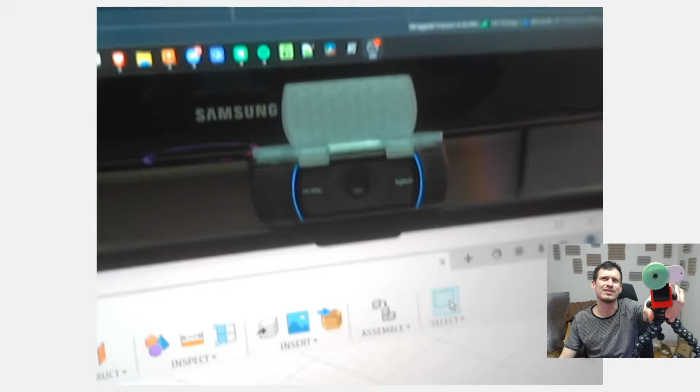What webcam is this? I don't know if you're referring to the webcam I'm holding, or the other one - there's 2 webcams. This one has a privacy shield that I printed, which was someone else's design, printed very long ago so I can't say more. The one I'm holding is an even older Logitech that I customized - I forget if it was broken or didn't have manual focus before. I think it might have been a fixed focus webcam, so I took it apart to add manual focus by unscrewing the lens. That works pretty well, so now I can do cool macro shots - not the highest quality webcam, but I can get close-ups of my sketchbook. For now I'm just using it to point around the room and show you guys things, since that's my setup right now with these 2 webcams.

Of course, I have my very nice camera that I use to film my videos. It's a GH6 that I'm up to now. I had the 5 for a while. I had the 4 for like a week before I found someone selling the 5 for the same price. So I traded those out.

That one, it's a bit of a process to stream using it because I'm using the USB-C storage. Oh, I can't be bothered to explain. I'm gonna eat another pastry. Then we're going to talk about last week's project, then we're going to start this project.

Nina, you haven't missed too much. You've missed the common ramblings of Devin. I mean, you missed me enjoying my first biscuit pastry, but I'll probably be enjoying my second nearly just as much. Although that one was pear flavored, which is extra novel to me.

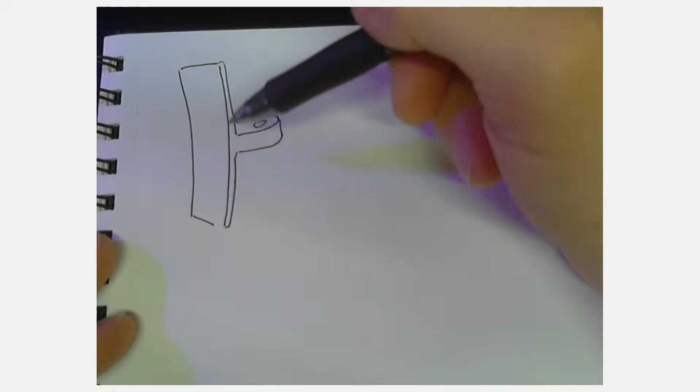Here's my idea. We got the curved monitor, funky curved monitor. So I'm going to make a hinge between the two because I do want to be able to adjust the position of the speakers slightly, but I'm thinking something like this. So this all being TPU, this here it's curved, but really it would be printed flat on the bed. Put some high bond double stick tape here. That can flex to conform to all sorts of different surfaces.

So not only will it be easier to design, but it'll also be more versatile so other people can use it, because I'm sure it's a very small margin of people who have the same two things they're trying to stick together as I do, these specific Creative speakers and this monitor mount. The speakers are not too heavy. I'm confident that weight won't be too much of an issue. There could be a little bit of sag, but I think I'll be able to compensate for it.

And also, the awesome thing about something like a Shore 90A TPU is you can really affect the flexibility based on how thick you print the parts. So you can even have different thicknesses within the same part and have some parts flex while other parts are nearly as stiff as PLA or any other print.

I'm also using this VHB tape for most of my projects where I'm trying to tape things like these hooks that I've been using. I have screw mounts, of course, but a lot of them I've also just been using acrylic double stick tape to stick it on my kitchen tiles and things like that. But that stuff works for most cases. In this case, I'm going to use some VHB tape, which is a little more permanent.

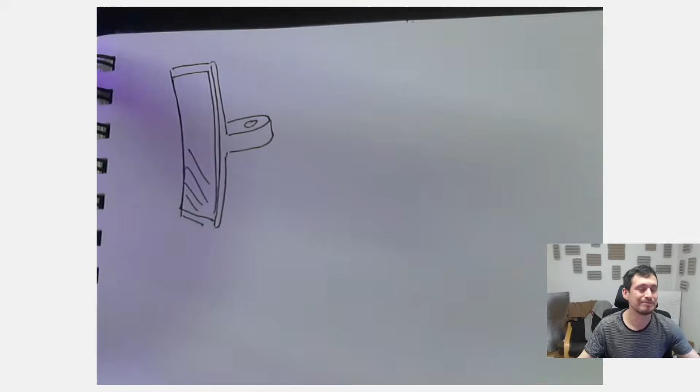This is a knockoff tape. These Chinese pirates have been very clever. It's not 3M, but it's 3M. I think that's so funny. Yeah. MMM. I think it was advertised as 3M VHB tape, but no, it's just 3Ms. Pretty funny. I'll give them that. And there were reviews. It has good reviews. I'm in Sweden now, so I'm closer to China, so it's less of, I don't know. It's probably still controversial, maybe. All right.

Evia, thank you. Thank you for the compliments. I'm loving it in Sweden. I'm so happy with my decision to relocate, and specifically very happy that I ended up where I am. I'm sure I'd have a crazy adventure moving anywhere across the world, because it's just such a game changer to switch things up like that. I lived in California forever, so to move to a totally different country, so cool.

If you can do it, and if you're confident enough to do it, I highly recommend it. To be honest, I probably wouldn't have done it without my sister already living here and being fully settled to help me out a ton. But it still was a bit of a gamble. It definitely was a risk, and it's paid off so well.

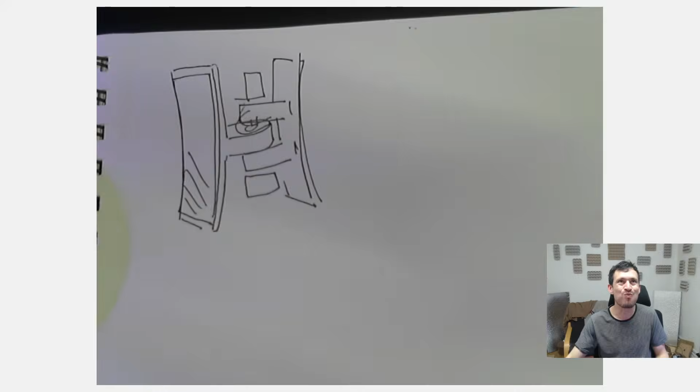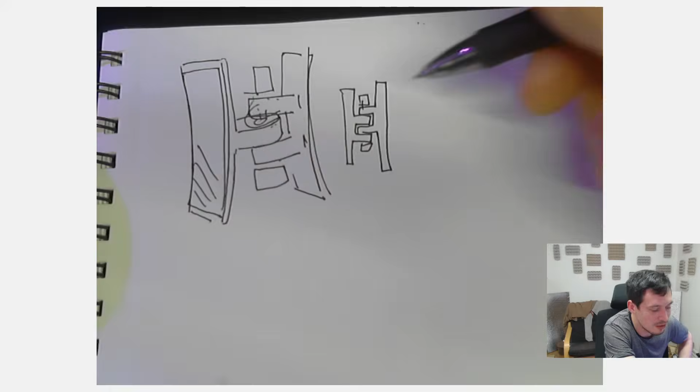I think that sketch, again, is pretty much all I'm going to do before I take it into Fusion. I think I have a pretty good idea of what I want to do. Although if any of you have some insight, obviously the more levels of hinges connecting, the more stable it will be. Like if I had 2 and 2 like that with a screw running through the center, that would be really strong. But I'm also considering just doing 1 and 1, making them thicker, and it'll be screwed together. I feel like that'll be enough, and that'll affect the flexibility a little less.

Maybe I'll go with my initial gut here, have a 2 and a 1, just so that there's some sandwich action going on. I don't really want to make it so that I have to adjust the screw to swivel these two parts. I want the TPU to act as a bit of a friction fit, if that makes sense.

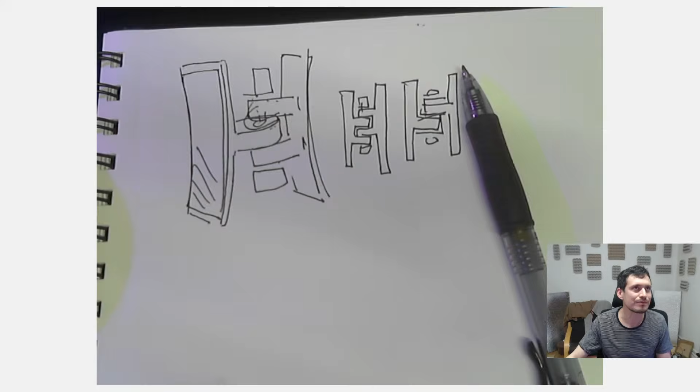Yeah, GoPro, make it like a GoPro mount. I think those are like 3 and 2, right? But see, those are being used for people who are jumping out of planes and stuff like this. This is a rather lightweight speaker just sitting on my monitors. I feel like that might be overkill, and I might just be able to get away with a simpler design. And maybe it'll even work better in some ways. To be honest, I'm not entirely sure what the best route is to go here. But I also don't think it matters too much. It's not going to be a super consequential decision here.

For the most part, the speakers are going to stay where they are, but I want them to swivel. Specifically, I want to be able to turn this one, which will be facing like this, this way so that I can point outside of my office door, and that's where my kitchen stands, because sometimes I like to play music into my kitchen. And these, I think they're tweeters. Are they tweeters or just the stereo speakers? They're very directional. So I do want them pretty much pointed right at my ears.

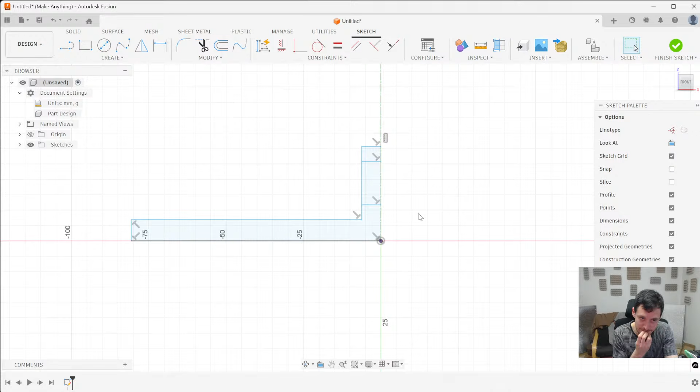We'll draw a line on the bottom. We're going to give it some thickness. And here's going to be the hinge. The hinge will also have a hole running through it because we're going to have a screw running through that hinge. Let's see. The thickness. This is where experience comes into play. I've worked with a lot of TPU, so I can imagine how thick I need this strip to be. I want it to be fairly sturdy. Like I said, there might be some drooping if I make it all too light. And I know this TPU will be flexible enough up to 3 millimeters. I'm gonna go with a 2 millimeter thickness.

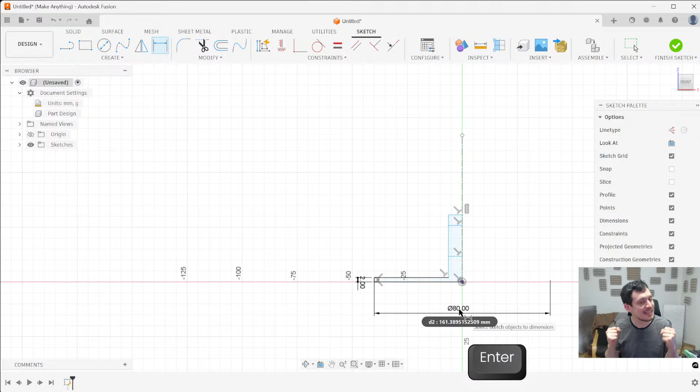We're gonna extrude all of this after the fact, so I will extrude it to match the width of the VHB tape here, maybe a little bit wider, but that's not a concern yet. We can think about basically the width of this strip, which will equate to the amount of tape we use. This tape is quite strong. I think we can get away with 80 millimeters. 80 millimeters of VHB tape on the monitor, 80 millimeters on the speaker should be plenty to keep everything stuck right where I want it to be. It's also a good length. As always, I suggest using calipers to visualize the ideas, so maybe I will want to go with less after visualizing this. There, 80 millimeters on the side of the speaker. I mean, seems pretty perfect to me.

Oh, by the way, from this view, you can see these PlayStation controllers, and these are actually mounted using the same technique as the hooks I designed. I used the exact same snapping dovetail design that I used for those hooks from last week's live stream. Made some mounts for my PlayStation controllers as well. I forgot to share that earlier. I kind of got carried away with these hooks since last week, and I've been doing nothing else besides making more and more hooks. That's very typical of me.

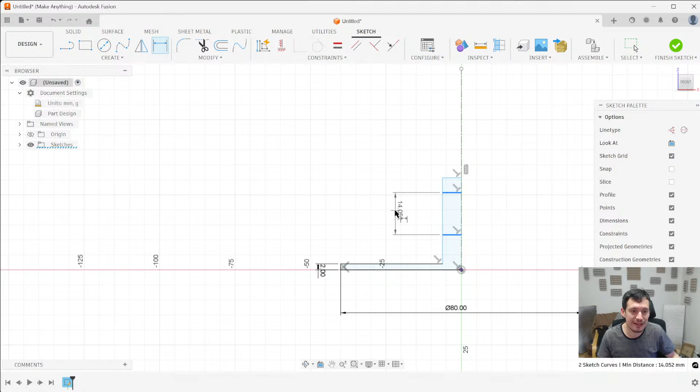Anyways, yeah, that visualization, I'm happy with that, and I think it'll work well. Next up, we've got this distance. This is going to be the hole that we have a screw running through. The screw, while it could be printed laying flat, I think I'm actually just going to print this vertically, which is not the best for strength when it comes to layer adhesion. But if I print it with enough shells, and if the diameter is large enough, it's still not a problem. So I'm just going to make a really nice chunky screw. It's going to be, let's say, 14 millimeters in diameter. And so this can be 15. We don't need to make the clearances super tight.

And you know what? I'm actually going to start designing, I think, all the parts within this sketch. And I am going to do the sandwich design I mentioned, so it's nice and easy and symmetrical. Now we're only designing half here. Just realize that we're going to mirror everything across this center line.

Oh my gosh. This is embarrassing, but I just learned this trick today on the Fusion subreddit, and I think someone was telling me to do this during last live stream. If I have this dimension, I can just click. Oh, is that not true? Someone mentioned that you can click on another dimension. No, because that's just going to tie the two. There's some way to, like, tie them together more easily.

Darn. What is it? Do I click on the dimension and then click here? There's some way to automatically connect those dimensions. If anyone knows in the chat, just let me know, because I heard it today and I was like, wow, if that's true, I've been doing things more difficult for a long time.

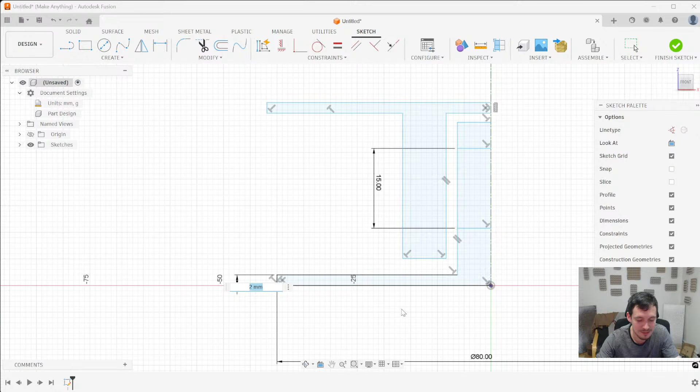Yeah, so I know you can reference, for example, here's how I would have done it before. I would have said strip equals 2 millimeters. And then I can go to this one and just make this one called strip. And then they're referenced to each other. Whoops. But is there an easier way of doing that? Whoops, I undid too many times. Strip.

So this is useful if you are using dimensions that will be tied together throughout your entire project. Now, if I print this and it doesn't work, I can make this 4 millimeters, and this one also becomes 4 millimeters. Obviously, in this case, it's just 2 dimensions, so they don't need to be tied together, but, yeah, I suppose you can also look into here. There's a parameters menu, and you can find it here, and it'll have a default name. I don't know. That's too complicated for me in most cases.

Also, very often you can just reference things or make things equal with constraints. For example, these 2 lines, I could do a collinear constraint, and then if I change this, the other one will stay collinear. That's one way to tie them together. But actually, lately I've been trying to avoid having these constraints too much because they actually can break sometimes and it gets very cluttered when you have too many.

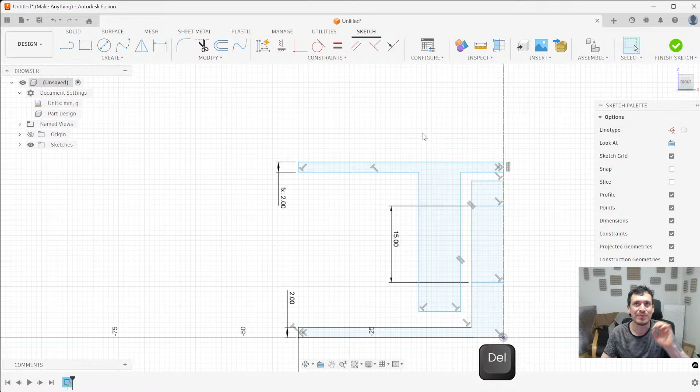I really think Fusion can improve the way that you can sort through constraints. For example, when you have one point with like 5 different coincident constraints, it can be very hard to select the one you want. So in this case, instead of just doing that collinear constraint, I might actually draw a physical construction line here, constrain that as vertical, and then it basically has the same effect, but you have more of a visual reference of the constraint there. And it's easier to delete it by just deleting that construction line down the line.

Anyways, here we have this piece here. Now, this is being printed in TPU, so we want this to be a little thicker. We want it to be rather chunky. I'm going to go with 14 as well. Could be 15. Sure, let's do 15 here. And because this is a center line, as you can see, this dimension is going all the way to the imaginary other side of this design. I will mirror all of this. Oh, maybe I'll mirror it actually once it's a physical thing.

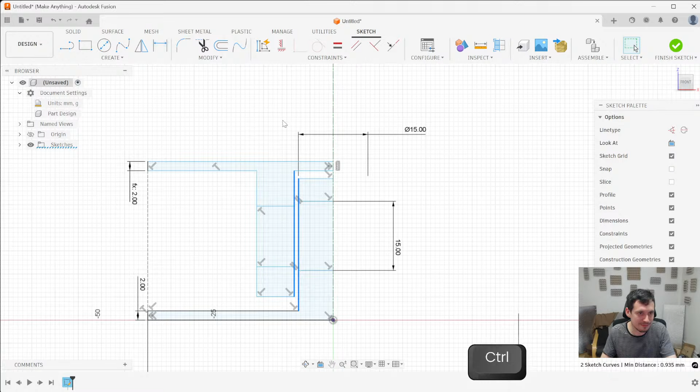So we're gonna have the same thing here. Actually, when you have a bolt running through a hinge like this, you often want the sandwiching hinge to be slightly smaller. That way this inner one stays loose. The friction is going to be between these two parts. This is going to have a very small gap. I'm going to make it 0.2, but we're going to tighten bolts so that it can be as tight as we need it to be. So this I'm just going to make 14 point... Well, let's make this one 15 and this one 15.6.

And then we can do more construction lines between these midpoints and between these midpoints, and then between those midpoints, all of these, just so that these stay centered with each other. If I constrain these to all be horizontal and vertical, now they move together, even though they're not collinear. There's many ways to do that. We could have had this line run all the way through and then offset a line just for this hinge. But anyways, this is working.

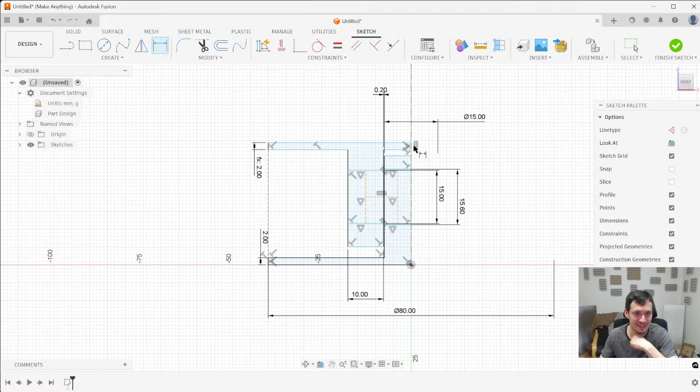This will also be 15. It's going to be a really chunky part, but actually too chunky. I'm taking it back. This can be thinner since we're having two, and we want to retain the flexibility of this back piece. So if this got too thick, this section of the strip will be less flexible than this section and this section. So we want to keep it small enough so that it doesn't matter, basically. Okay, let's see. Next up, these can be collinear.

Between the hinges here, we don't need too much space. We can make it 2 millimeters. We are going to round the ends here so that they can hinge quite freely. Now let's see, what is still lacking constraint? These could be longer or shorter. Did I not? Oh, yes.

How much space is going to be around the holes? That doesn't need to be too much. I'm going to go with 6 millimeters. And 6 millimeters here as well. Now, with all our constraints here, you can see all the lines have turned black. That means we can't click and drag anything anymore. Everything is fully constrained. All of these measurements tell Fusion exactly how these parts should look.

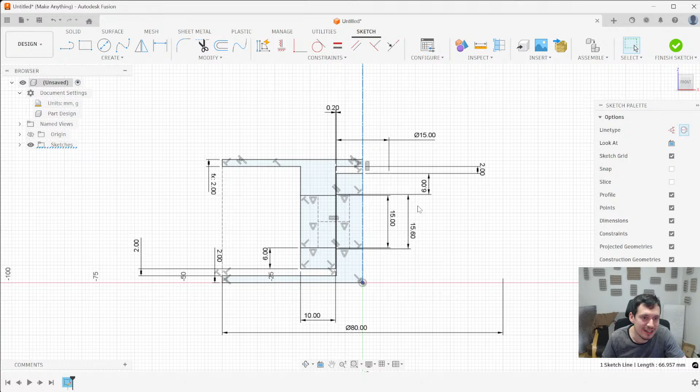Now this center line, it's more often used for rotations. I believe if I try to extrude now, oh, I can't extrude everything. Okay, so let's just do it this way then. We'll extrude. We're gonna do a symmetric extrude. I like to always use whole length just because it's more intuitive. The VHB tape, I think it's 20 millimeters. I'll measure, double check with my calipers. Yeah, just under 20. So we can make this strip 22, just give it a little bit of extra edge.

Oh, whoops. Oh, haha. Yeah, I'm going to select all of those for now. I'm going to have to cut the holes out of here as a separate process, but let's do this. Let's do a mirror command and mirror both of these bodies across the right plane. We can just use the join operation since these profiles aren't touching. It'll keep it as 2 separate bodies.

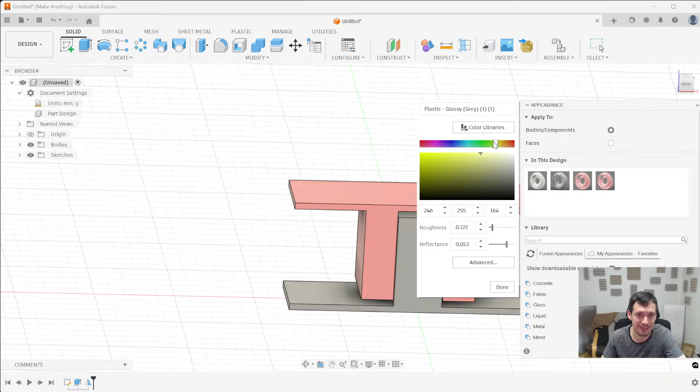I can open the appearance panel and give them 2 different colors so that we make sure that we don't accidentally merge them together and not realize it for a long time. Speaking of not realizing things, I'm going to go ahead and save my project now.

So, meanwhile, I will try my final biscuit, the strawberry one. I guess it has a white chocolate coating instead. Not a big fan of white chocolate, but maybe it's strawberry cream. Let's see. Very good. But I think the pear was actually my favorite, so I'm officially a fan of pear flavor. Bring it to California. The US needs to know pear flavor.

Okay, let me save this really quickly. Monitor to speaker mount. Easy.

Okay, so yeah, I didn't consider that these holes actually want to be a revolve. So we can use this line here. Whoops. There we go. We can also make that a center line. There can be multiple center lines within one sketch. Now I can go into this feature tree, turn that sketch back on to use it for a second operation. And now if I just click here, it's gonna by default try to select this face, but I want to select the sketch within, so I can click and hold.

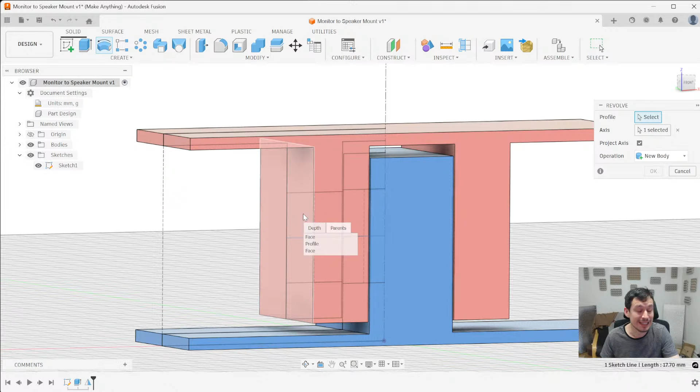Oh, sorry. I have to first go to profile. That's the other thing. When you have a center line and you click something like revolve, it'll automatically select the center line as the axis, which is nice, but in this case I just forgot. So now I go and click profile, click and hold here, and then I can select that profile. If I hold control, I can select this one as well. Oh, but now it's only half. Okay, that's okay. Let's hit okay, and then we'll actually drag this.

Another fun thing with Fusion being parametric is we can go down here. There's a timeline of all the processes, and we can drag this hole we just cut to the front of the mirror. And now that hole will be mirrored as well. Next up, these rounds should be matching. What was the thickness here? 15 divided by 2? No. 22, right? So let's make that 11. And 11. So that it's a perfect round.

Although, yeah. I'm going to have to make some changes. Because these circles, there's not a consistent width around here. I got a little sloppy with my sketch.

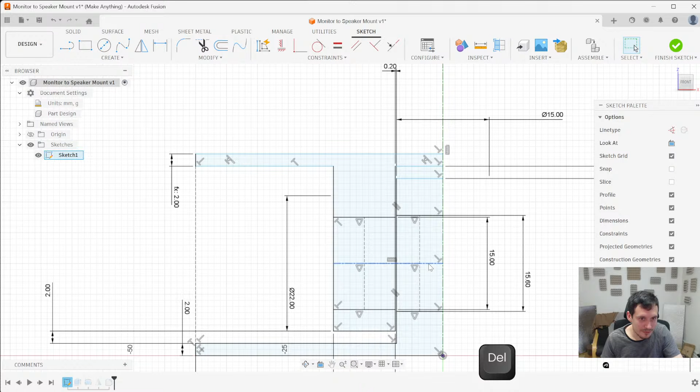So rather than making this 6, I'm going to dimension between here and the center line. Or I guess, yeah. And make that 22. Whoops. Let's constrain this. 22. Now I believe, yes. Now we have a nice consistent thickness all the way around this, and the thickness of this 3.5 millimeters. It's a bit small, but you know, compact design is nice as long as we're able to tighten the little screw that's going to be in here.

Will I be able to fit my thumb between these parts? So silly as it is, I can actually just use the calipers and measure the thickness of my thumb with a little bit of space. Let's say I want it roughly 27, 28 millimeters. Now I can select these two surfaces and see that here the minimum distance is 26 millimeters. So pretty good. Pretty good. I think I can accept that. That'll work.

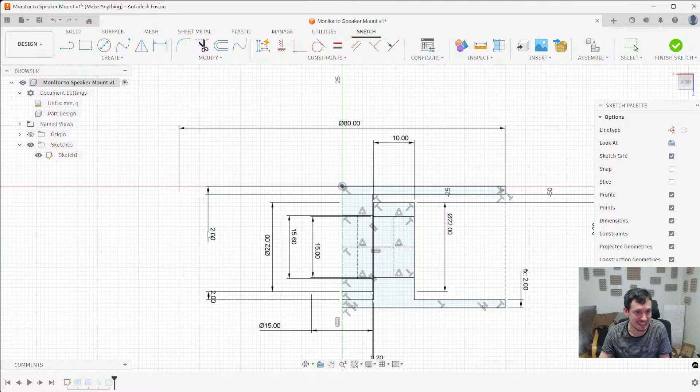Okay, I'm not going to accept that. I'm going to make it a little bigger, make it comfy for myself. So to do that, I'm going to increase this gap, the space between these. I'll make it 5 - let's be generous.

So now if you check here, it's 29 millimeters between them. And did I do something to make this thicker? Why did those become 5? Are these dimensions tied together somehow? What have I done?

Oh, I clicked the wrong one there. 5. This should remain as 2. There we go, got it.

This is nice, parametric design - so fun. You can be really quick and sloppy because you can always go back and fix it. So I'll make a lot of little mistakes like that, but it's not a big deal. In something like Blender, where your decisions are more baked in, it might be more annoying. Doesn't work for me personally.

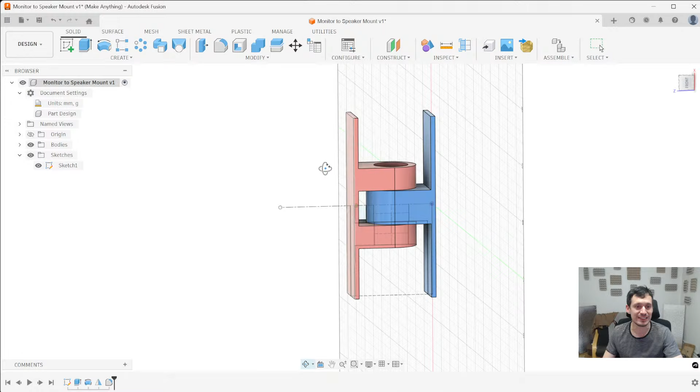Anyways, now we've got a very simple hinge with these thin surfaces that will remain flexible. As I mentioned, these areas here will be less flexible - they won't really curve, but they're such small lines that with the allowance of the VHB tape, which also has some thickness, I think it'll conform very well to the surfaces of my monitor and my speakers. So I'm happy with that.

Next thing we're going to do is design a screw, a nut and a bolt to hold these two parts together. I'm not going to do anything too crazy - I'm not going to capture the nut inside of the design. We're doing it quick today because this design is just for me, since no one else has this combination of speakers and monitors, but I am designing this in a way that it's a little more versatile, so I should spend the time.

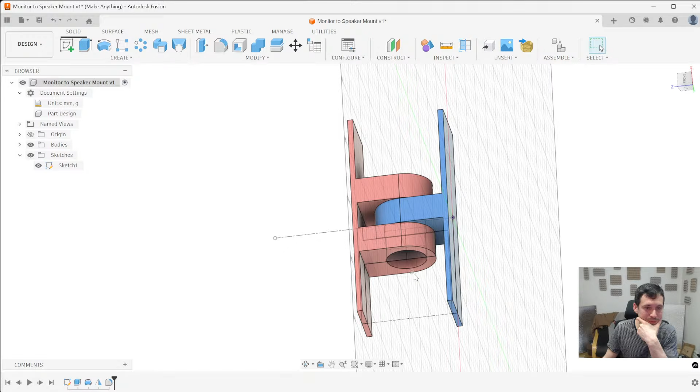I'm going to make this thinner - it doesn't need to be that beefy. I want a little bit less space there. And what else do I want? Will I capture the nut? I think I will. We'll get there.

For now, I'm going to do - oh no, Fusion just had some big update. Apparently they've added an AI assistant, but luckily Fusion Clippy hasn't popped up for me yet.

But I did notice this display component colors has come up on my menu - can I get rid of it? Oops. I honestly never need to work with components. My projects are simple enough that I just deal with multiple bodies within a single part. So right now I can click on these 3 dots and unselect pin to toolbar because I'm never going to use that. I can even go to change keyboard shortcut and delete that because I don't want to accidentally press Shift N. So if you find yourself being sloppy like I do and suddenly all your parts change color, then maybe it was that, and maybe you want to get rid of that shortcut.

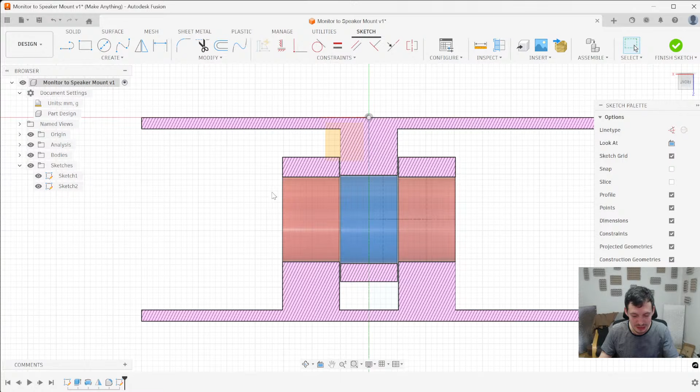Anyways, one thing that I did add to my toolbar here is this section analysis - I use that very often. And we're going to do that now. Section analysis right through the center so we can see it like so. I can turn on the origin, select that front plane, create a sketch, and we're going to draw our bolt.

So we're going to start with another center line - this is going to be a pretty simple shape. I can hit P to project and select one of these holes so we can reference that. If I draw a diagonal line between the two, and then use the point tool, I can drop a point in the center of that - that'll give us the exact center. I can select this and use midpoint, and now this is locked in the same axis as these holes.

Very good, now we can simply draw our screw. Let's go like this - it's gonna be a bolt, it's gonna have a little head on the top that we're gonna use. Oops, I forgot we only need to draw half of it. I'm gonna give it a nice tall knob for controlling - and actually, the knob, no, this is fine, it just needs to be a little bit bigger. I want it to be a rather thin, tall thing so it's very easy to twist - we'll give it some good grip as well.

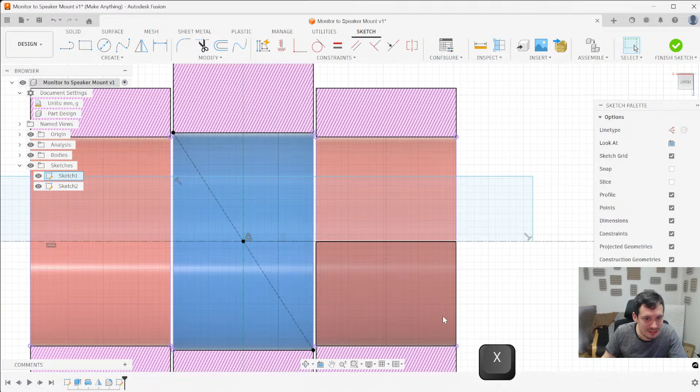I'm also going to project these two surfaces because we're probably going to need the start and end. We could click on those projections - am I selecting the... here, select these lines. Normally X will turn them into construction lines - it worked there, it's not working here. Not exactly sure why.

Anyways, it's nice to turn a lot of projections into construction lines if you're just using them for dimensions, so you don't have to select as many profiles later that get in the way.

Just very little tolerance here, 0.1. How far do we want this to extend? Quite a bit, so that we can have a nice, good bolt on there with plenty of threads. Although, like I said, we're going to capture the nut, so the nut is actually going to be overlapping with the bottom here a bit. I'll probably adjust this. Let's make it 10 for now.

Thickness of the nut at the bottom, just gonna use my calipers. Let's go with 14. This can be pretty wide. Oh well, yeah, I forgot it's also large. Maybe 25.

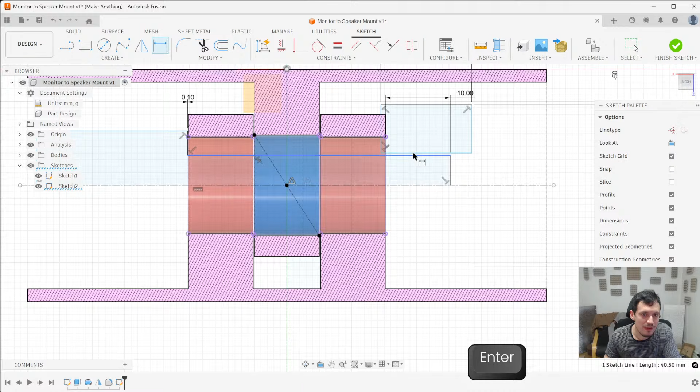This doesn't matter because we're gonna add threads there, so the inner dimension, those dimensions will change. This head, let's see what it's at. 16. Let's make it 18. Just going by vibes right now. Making this 20, nice and tall, like I said.

Might still be annoying because I forgot I need 2 fingers to reach in between there, unless I use an Allen key. I really kind of want a lot of space between these parts to be able to adjust them with my fingers. Like 45 - either I make it 45 or I rethink how I'm connecting these. Right now it's at 32. I mean, the thickness doesn't really matter, it's going to be hidden.

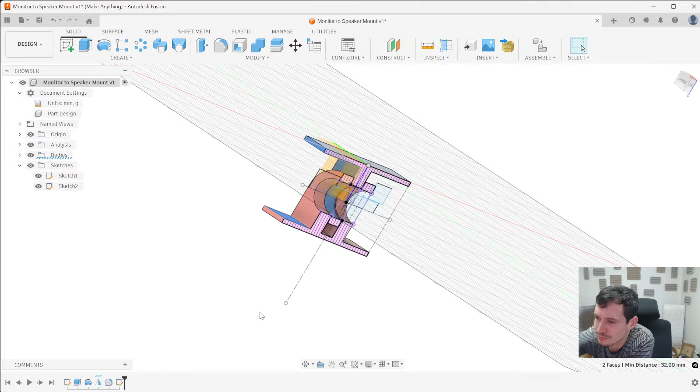I just had a realization - this design isn't exactly going to work the way it is right now. I need 2 hinges if I want the speakers to be able to wrap around enough to face me, because these two will just not work. Let's see if I can illustrate this. If one of these is connected on this flat face and the other one is connected to the back of the monitor, it'll only be able to fold so far, and I need it to fold all the way around like this. So I'm going to need 2 hinges, I think.

Which isn't going to be such a huge change, but it is a change to the design. Again, parametric design to the rescue. I'm going to go back to my original sketch. So this is how it's going to go down. I'm going to delete some things, but I'm also going to stick with a lot of things. I'm going to delete that dimension that I had there.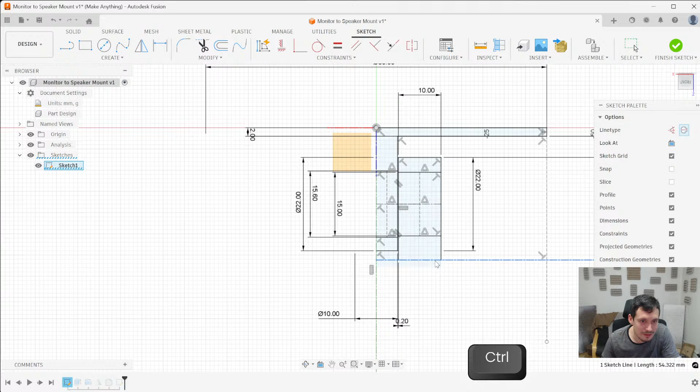So I'm just going to mirror everything here, and I'm just going to add another mirror line. Check this out - it's a quick fix. It was a silly mistake, but it's a quick fix. We'll make it a center line. Now I can select - well, we can also do this later. Let's see.

But yeah, we still want the distance here to be something. Now it's 58 with the double hinges, and I'm even going to make it 60. It's all going to be going backwards behind the monitor, so it won't really be visible. Oh yeah, now I'm breaking a few things, but I can just go back here, do that. That's okay, this is okay.

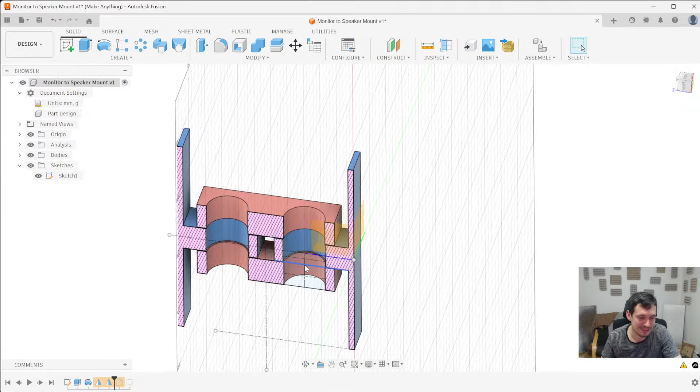This mirror made it a little unhappy for some reason, but now I'm just gonna mirror again, but along this axis. And boom, now we've got 2 hinges. It wasn't a big loss. Let's see, what are these warnings? Compute failed, could not join, multiple bodies created. Okay, I mean, I didn't want it to join everything, so that's actually an error, but exactly what I intended. So I can ignore those, basically.

Here, yeah, these edges change. I'm gonna select these, turn off analysis here. Make these 11. Make these 11.

I built it different. What is my favorite brand for TPU? I've been trying a lot of different TPUs. Certainly the really cheap ones can be a little stringier or need to be printed a bit slower, but I, for one, usually will accept that for the cost savings because I'm printing a ton. It's nice to save money. But that said, after using a lot of these cheap ones and noticing a little more stringing and messiness, I've come to appreciate Bambu's TPU, because my Bambu 90A, 95A HF, I think - I don't know what the HF stands for. High fidelity? I don't know.

Anyways, Bambu TPU works really well. It gives me some of the cleanest prints.

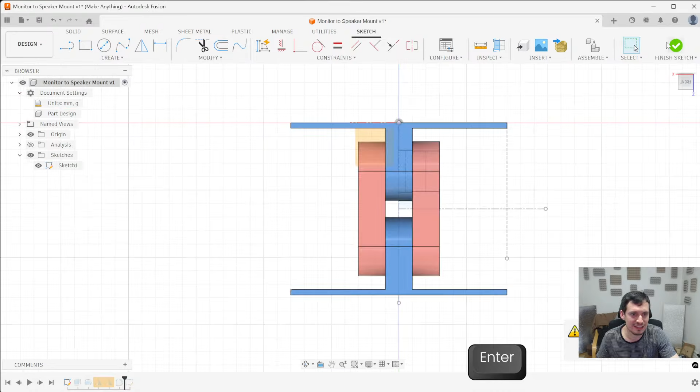There we go, I think that fixed my design error. You know, I blamed these live streams for potentially me making silly mistakes. But now that I think about it, I spend so much time here just rambling and dilly-dallying with the design that I am noticing some things that maybe I wouldn't have noticed before printing a prototype earlier.

Anyways, let's get back to this sketch. Now we're just going to have 2 screws, but we'll have more space for them. Ooh, but there will still be not as much space between the - oh sorry, wrong camera. There won't be as much space between the screw and this wall, which is essentially the monitor and the speaker. That spacing is more important. Oh no, we'll be able to grab it from the side. Never mind, everything's good, it's all good.

I mean, I feel like the gap here is unnecessary, but I don't think it's hurting the design either. I think we're okay. Let's edit this sketch.

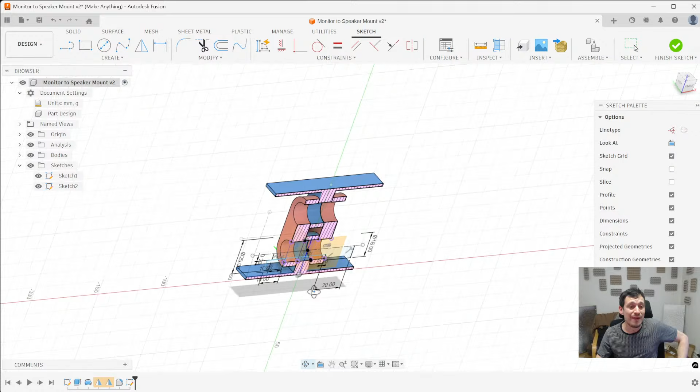I have an idea. Now that the part is split up like this, that changes the way things are printing, actually, for the better. Because now these pink parts can be printed flat, which is a better orientation for creating threads, which means I don't even need this bolt at the end. I can have this screw thread directly into this bottom part. Yeah, why not? Saves me some complexity of the design. This is gonna work out.

Now this actually, I can still make it extend a little bit beyond, just so that we have something to work with - 2 millimeters. But now we want these to be close together. Well, yeah, this will change, you'll see once we get into the threads. In fact, I'll make it 0.6 just so it's a more clear separation. Okay.

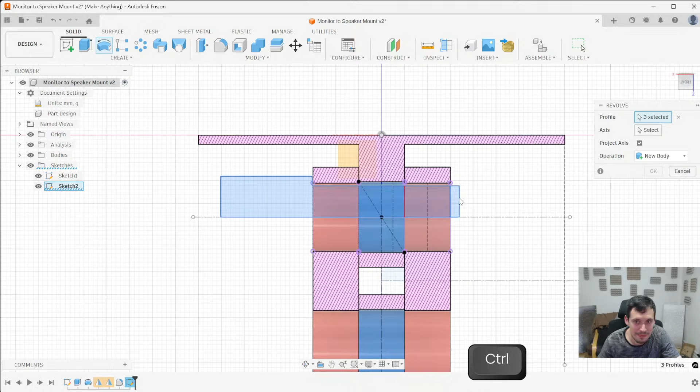Let's revolve this now. Select all the profiles, revolve it around that center line. It gives us a new body since we dimensioned gaps between every part. That's all good.

Keeping it very simple, just got these cylinders and squares for now. We'll make it pretty later.

Time to add threads. Now, just a little bit of - just to let you know, I'm going to be using some custom threads that I designed for 3D printing, which I haven't made available yet because this is still a work in progress. But to be frank, well, let's get right into it.

I'll show you, for those of you who haven't done threads before - it's a nifty built-in tool into Fusion here. You go to the drop-down menu, select thread. You can select both an inner and outer dimension. So why don't we start with this one? We select that, and now you've got all these different thread types. If you click modeled, then it'll create the physical threads.

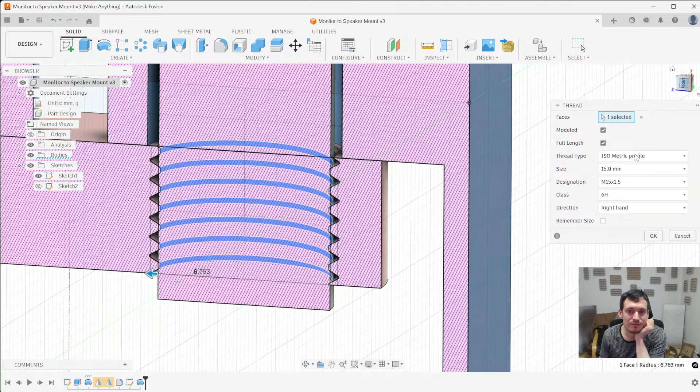And when you look at all the different threads available here, these are more designed for traditional manufacture. There are a lot of different standards that exist for thread design. You'll notice that pretty much all of them have a kind of steep thread, because generally that is better - it'll provide better grip, it'll be stronger.

But with 3D printing, you all know I like to keep things at 45 degrees or less in terms of steepness, just so that we can have the best print quality. It's a good general rule that I stick with. I don't like overhangs more than 45 degrees when I'm printing something without supports, and I almost always avoid printing with support. With that said, I will concede that threads generally can handle overhangs better than if you were to just print a flat overhang. The fact that these overhangs are spiraling upwards in the way that a thread prints, it actually works okay.

But I've been working on my own custom thread designs. So you can see here, I've got these Make Anything print threads. And if I select that, you'll see, well, for one thing, they're much larger. Nice for creating strong threads. But also, they're 45 degrees. I'm definitely going to make a video about this down the line once I have it all figured out.

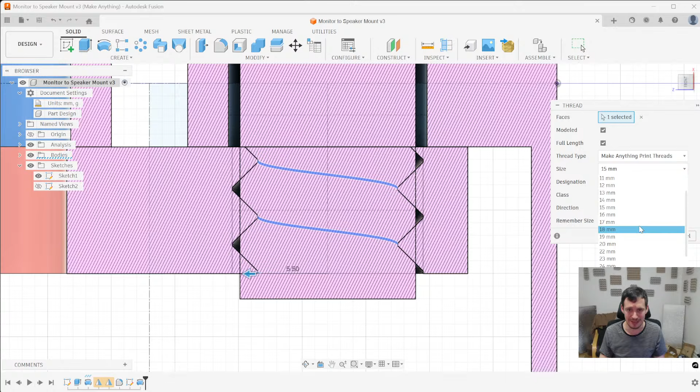As you can see, I have a lot of different dimensions here. I've started at 7mm and gone up to 30 before I start doing increments of 5, and then I've done increments of 10 after 60, because I've been doing this the old school way. I've been manually writing the code for all of these different dimensions, not only the different diameters, but also different thread sizes for each diameter. I've just been editing the code like a sucker because I'm not smart enough to write a program that automatically fills in all the different thread diameters from 7 to 700, but that's kind of what I want.

And also, I tried using Microsoft Copilot, and it sucked. It did the job, but with plenty of errors, to the point where I ended up preferring to do it all manually. So anyways, if I didn't have those, the standard, what are they? Maybe not the ANSI. I like these pipe threads because they're rounded. I would look for one of these that's not too steep and not too intense. ISO metric screws probably would work fine. But mine are a little better.

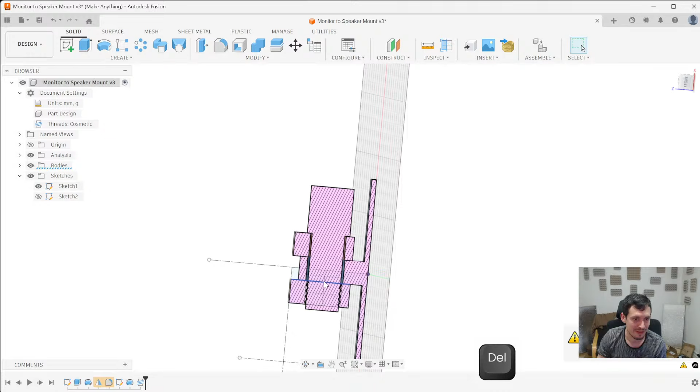Anyways, generally you want about 3+ rows of threads to engage to get a good grip. So here with the 2.4mm threads, we get 4 of these rows of threads. That's perfect. So we can click remember size. We want to do the same thread here. Although actually, this is going to be a symmetrical design all the way down the line. So I'm going to undo this mirror, and I'm just going to work on half of the design for now. And I'll mirror it later, so I don't have to do all of this twice.

But if we select this cylinder now. Oh, hold on. What happened here? Why is this split? Did I split that? Or did I? Oh. There we go. A little gap that I didn't account for. Now if I select this piece, we can use the same thread tool. I had it remember what I selected for the other one. I also have 3 different classes, like different tightnesses of threads. We're just going to go with standard here.

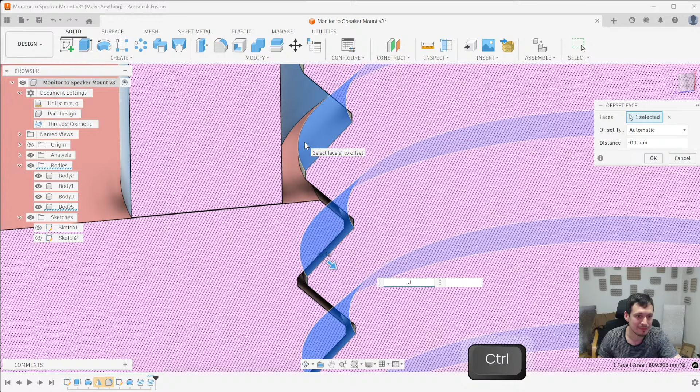If I turn on this body, you can now see that because it's using the same settings, we have perfectly lined up threads. The way I created these, they have the appropriate clearance for 3D printing. If you were using one of those other threads, what you can do is select one of these thread surfaces, use press pull, and then you can go -0.1, -0.2 or something. Well, maybe not that much. But just like that, you can add more clearance between the parts. A lot of people like to do that with the standard screws. Add 0.1 clearance.

This thread, we don't need this going all the way through like that. So we'll go back here and we can unselect full thread and just pull this up until it's just a little bit higher than it needs to be. Like so. Now we've got 2 threads, but if you look at the bottom edge of these, you've got them coming to this really sharp point. And there's not really anything guiding the threads together.

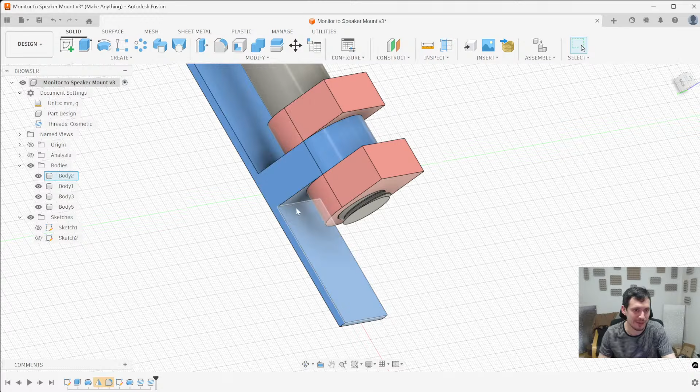Like if you look at a nut and a bolt, they've got nice chamfers on them. If we just try to chamfer this, it might kind of work, but it's also a little weird looking. So here's the best way, in my opinion, to make these parts quickly fit together really well. First, let's name all this. TPU connection.

Mid, hinge, bottom. Some terrible names, but I know what they mean, so that's all that really matters. And bolt. So we're gonna hide everything except for the bolt so we can focus on that first. First thing I'll do is select this top surface and create a sketch on here. Now, luckily I have this top part of the bolt, which I can project to get a center point that is the same center point for this whole thing.

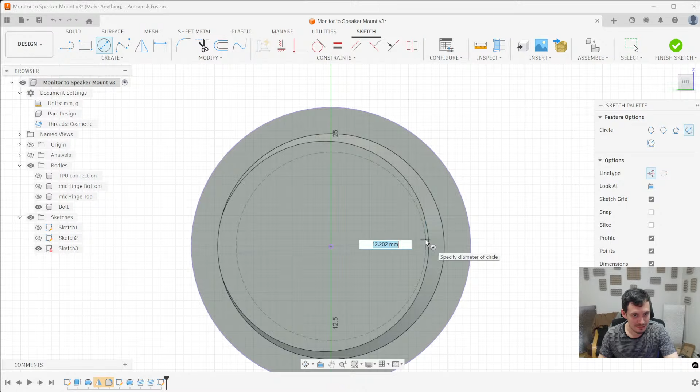But after creating the thread, you see, now we've got this kind of off-centered circle just because of the nature of threads. But now we can create a center point circle using that projected center point, and we're just gonna make this smaller, small enough so that it's not touching any of these bottom edges. Maybe a little smaller. I do go by eye here. We'll create another circle that is much larger now.

Now we can select all of these profiles, hit E to extrude, extrude up towards the bolt, and do a taper of -45. And that creates a kind of chamfer, but it's a lot cleaner than if we were just using the chamfer tool. Now there's this kind of flat face on the threads. That disappears at the top here. So you can select that and re-add a chamfer there. 0.15 will match this. That cleans it up a little as well.

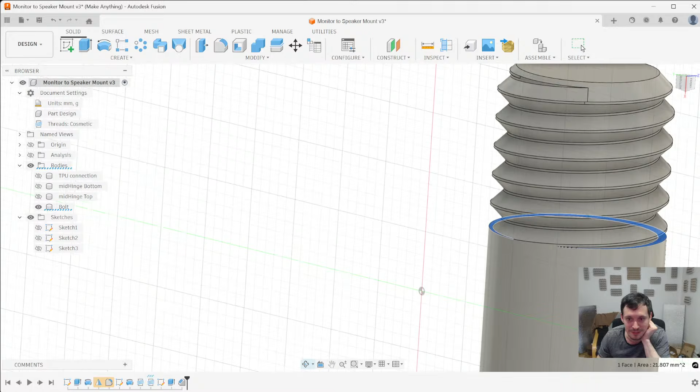And there we go. Just like that, now the end of the screw will interface with the bolt and line up much more easily. We can also do something similar here, where there's this weird transition between the non-threaded part and the thread. I'm going to draw on that face, and then I'm going to project this circle, and then I'm going to select it all, extrude upwards, -45 again, and this time I'm going to use join. So that's just going to blend the thread together into this straight part a little nicer as well.

Now we do have to make sure that that isn't going to interfere with the part that it's screwing into, but as you saw, I made this thread go a little bit higher, so sure enough, it's not going to be causing any problems. So now we've got a nice threaded part of this bolt. That's how I do all of the threads for all of the parts that I have involving threads. I always clean them up like that. And we'll pretty much do the same thing for the outer thread. So we'll select this face first.

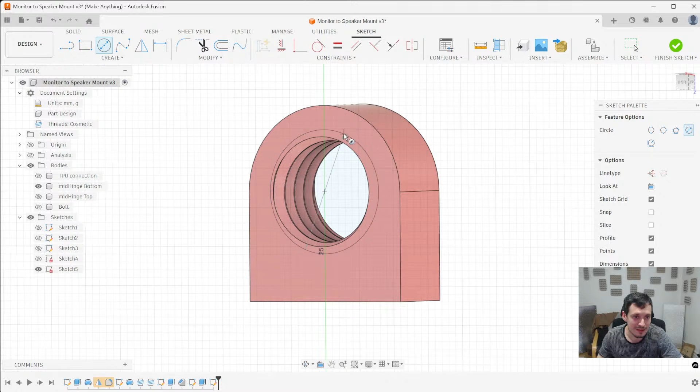Now, once again, you can see it pops up this constraint. It's actually referencing this outer curve, which matched the cylinder. Otherwise, you could create an axis or something to keep that reference before you make the threads. But anyways, we have this centered properly, and I'm just going to make this a bit larger than the widest part of this off-centered circle that forms the threads.

We could also check the dimension between these two, and at this thickness it doesn't really matter. If it was a thinner, more compact part, we'd want to make sure that it's a multiple of the nozzle width of our print. Doesn't matter here, but I'll do it anyways. Let's make it 3 millimeters. Now I'll select all of this, extrude towards the thread, taper it -45 again, and then we get that nice clean chamfer again.

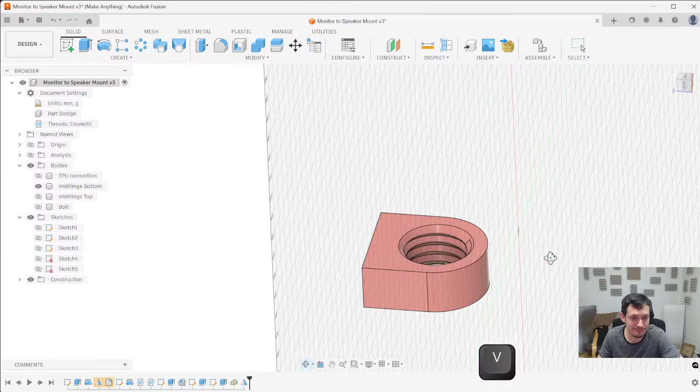We want to do that on the bottom as well. So either we repeat that process, or I can select this face, construct a midplane, select that extrusion we did, and mirror the feature across that midplane. So that'll kind of do the same thing but much quicker. Now we can hide this. So there we go. It does remove some of the thread, but it makes it much cleaner.

If we do a section analysis, we can see that there's still a good 4 threads that are engaging. And also we can do the same thing on these inner threads where we'll chamfer this last bit, 0.15. So it doesn't have any super sharp overhangs. Cleaner printing, a more gentle way for the 2 parts to thread together. Okay.

I feel like I've done designs in the past where I did put a loose screw underneath the part, and now I'm wondering why I haven't done this before, where it's just screwing into the hinge itself. I hope this works. Hopefully I'm not just missing something very obvious.

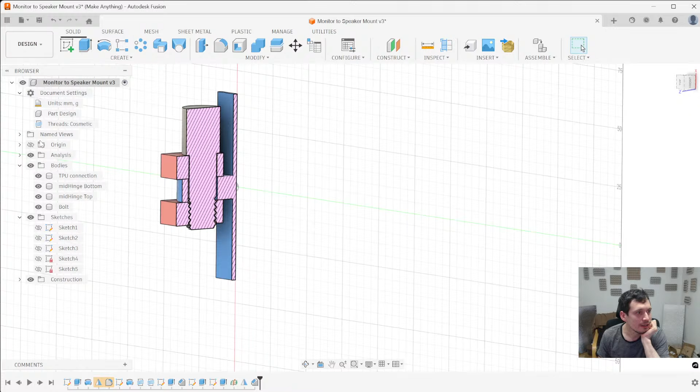Anyways, that looks good. Now we can just pretty much start doing some of the cleanup. I guess another big thing we want to do: while this would work, we could probably grab this dowel end and just twist it with our fingers. It'll be a huge improvement to add just a little bit of grip.

So I'm going to draw on this top face here, project it so we have that center point, draw a line up, and I'm just going to do a nice and easy grip, just some vertical channels. So I'll create a circle here. Let's make it 5 millimeters. I just want to overlap it so that it creates a nice cutout. It doesn't have to be aligned to the center or anything. I'm doing it by eye again. I'm not even going to fully dimension this sketch because I don't think it's necessary.

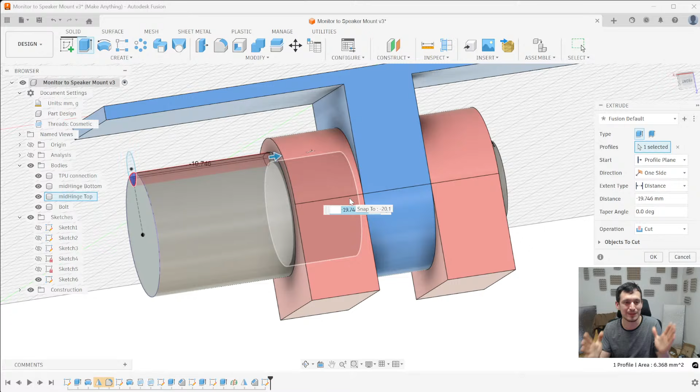Now we can select that and extrude downward. And since this bottom part of this bolt is actually going to be squeezing the hinge, I don't want this channel to be cut out all the way to the bottom. I'm going to leave a gap here. So let's see, how tall was this? 20 millimeters. I'm just going to make this go down 16. And if you think about it, you're really only going to be twisting from the very top for the most part.

Let's hide this for a second so that we can just see things a bit better. We can clean this up. This is going to be printing upside down like this. So we do want to get rid of this overhang. It probably would print just fine, but it'll print nicer if we chamfer this. And we'll just chamfer it until it won't let us chamfer it anymore. More or less. There we go.

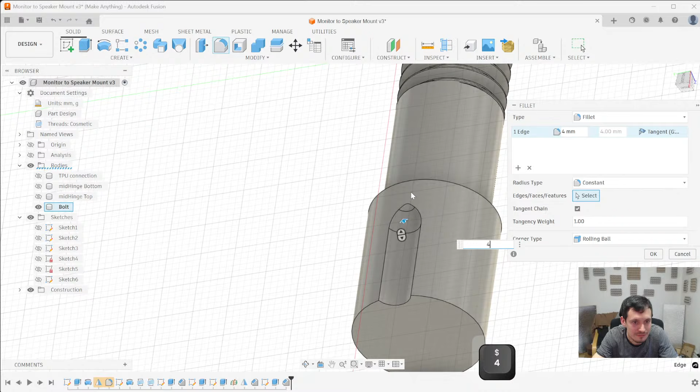Then we'll add a fillet as well. That big fillet just to make it look a little prettier, and then one final fillet just to make sure that this edge, we do want a nice grip, but we probably don't want a totally sharp point. If we make this 0.6 millimeters, it'll be a little bit more comfortable.

Of course, we want more than just this one channel. We want these all the way around. And what we can do now is go down to the feature tree. We'll start by clicking that first cutout we did, but we can hold shift and click all the way to the last one to select all of those operations at once. Then we're going to use circular pattern. We're going to pattern those features around the axis that is this bolt.

So you can click just any face that is following that axis. We can select there, we can select just the circular edge. It all works. And now we'll just increase this until it looks good. 7 seems to be doing the job. Let's see, select these 2 points, minimum distance of 2.3. So that should print quite nicely.

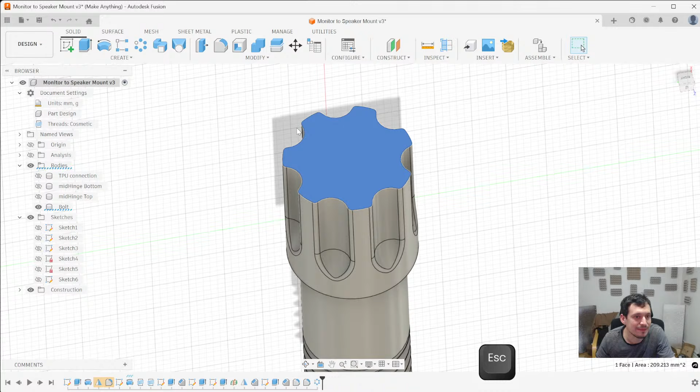And to make it a little prettier on the top, let's see if we can give that 0.6 millimeter chamfer as well. Actually, you know what? I'm gonna do something. I'm gonna create a circle here. This is just a different way to do a slightly different looking chamfer. Now I'm just gonna select this circular profile. I'm gonna extrude all the way up through this screw and switch it to intersect and taper 45 degrees outward. That's like a chamfer, but just a little nicer looking, I think.

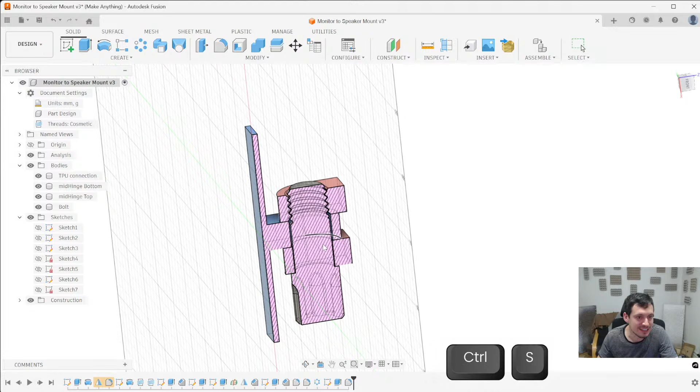And then we can also fillet it. This could also be done as a circular pattern, but it's only 7 edges, so there we go. I think that looks nice. It's a big old chunky bolt we got here. Let's turn everything back on, look at the section analysis, see what looks good and what doesn't. Overall looks pretty good.

Here, let's see, we've got 1.5 millimeters of overlap. I wonder if I should make that a little bit larger, because this is where the pressure is going to be coming from. Let's see what happens. Let's see if I don't break my whole design. I actually know, because I didn't dimension the circles for this cutout, it's going to get a little wonky, but I'm going to go all the way back to when I first sketched out this thread, and I'm going to turn this up to 20.

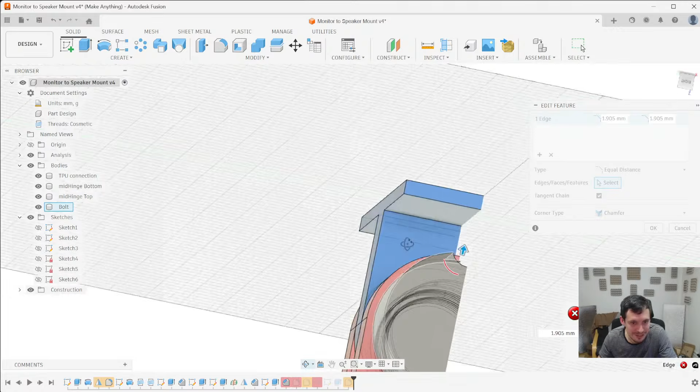Just a little bit more of an edge to overlap with the hinge, so it can do its job a little better. And yeah, sure enough, like I expected, it broke a little up here. All I have to do is go back to this circle and move it. If I want to do things right, I can add a point here and dimension this so that it'll adjust together. It's still a little unhappy because we had this chamfer that was very specific.

There we go. And that fixes it. The circle's also a little different here. Kind of looks a bit nicer, but I think I liked how it was before. There we go.

There wasn't a shortcut for toggling the analysis. It's just in the feature tree here, you can click the eyeball on and off. Of course, here I only have the one analysis, so it just by default still has that selected. You might also have to drop down if you have multiple section analyses. You can turn them off on either one.

There probably is a shortcut actually, but I don't know what it is. Let's see. Oh, yeah, if you click on this and hit V, that's hardly saving you any time.

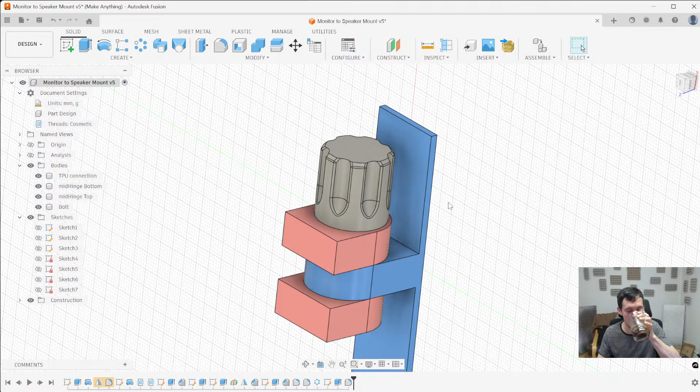Is Fusion better than SolidWorks? Honestly, I don't know, because I used SolidWorks for a long time, and then I switched to Fusion, but I haven't gone back and forth. I've never used them at the same time. So I'm not sure what state SolidWorks is in nowadays. Probably been a good 6-7 years since I used it.

It probably can handle more complex projects, but for 3D printing design, Fusion is at a really sweet spot. And they both crash, sometimes for very stupid reasons. So unfortunately, there's not a clear winner when it comes to that.

Okay, I think we're pretty much done functionally. We can start doing the cleanup stage of things. Of course, those final fillets are functional. They're adding strength, and I'll talk you through it. But I think at this point, we are ready to mirror this design and see it a little more in its full form. So I'll select all the bodies and mirror them there across that hinge.

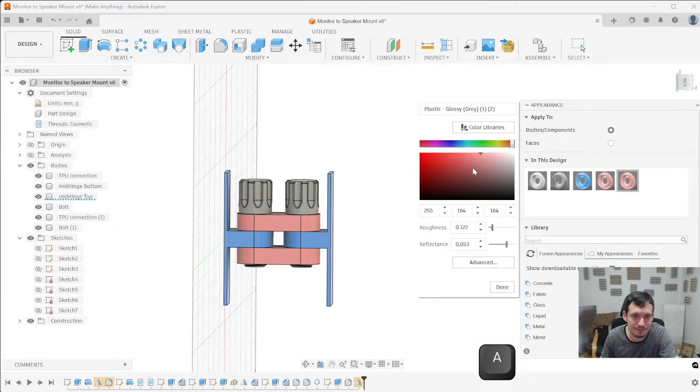There we go. Just for fun now, mostly for fun, I'm gonna complete my color coding of every part separately. That's a bit dramatic. All right.

So we'll start with the biggest things. We can do some pretty big fillets here. These are going to be printing flat against the build plate with this large surface, so no problems with adding a fillet here. It only reinforces the strength, and also because these parts are going to be bent, it kind of tapers out the flexibility of these parts that will be printed in TPU. So I have a feeling that'll be a good move.

If I make this a 7mm fillet, you can see it starts to overlap with these hinges, which we don't like, but we're gonna go right ahead and add some chamfers to these faces as well. That handles that. Well, first of all, it doesn't totally handle it. I think it's still overlapping a little bit, so maybe we'll make that fillet a little smaller. Let's make it 6. There we go. That's pretty much perfect.

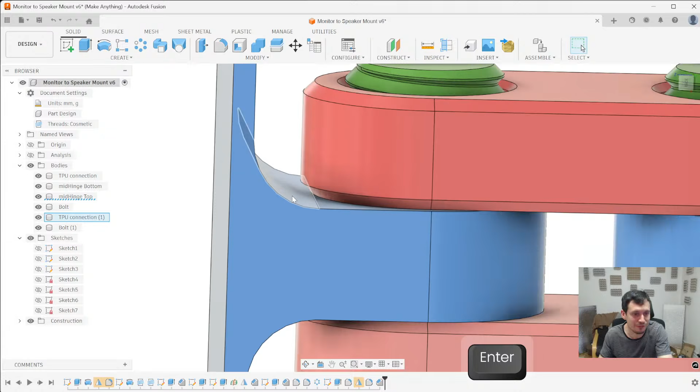So I do want a matching chamfer here at this hinge as well. I can make that one, but I'm not sure I want the chamfer to extend all the way to this thin strip. Actually, I do. But let's say I didn't. Then I would just go back on the feature tree to before I did the fillet. Then I could fillet this edge because it has an abrupt ending.

And then there's some weird stuff that goes on. You'd have to play around a bit more. Like now you could do a second fillet like that. Let's say this is a 0.5 chamfer. Let's see what happens if I fillet this edge now. It does get pretty wacky. Yeah, there's some fine line here where you can kind of make it work. Not the prettiest transition.

At some point in the live stream, we'll probably have to get into some more surface modeling to be able to handle really interesting transitions like that. Of course, you've always got the good old...

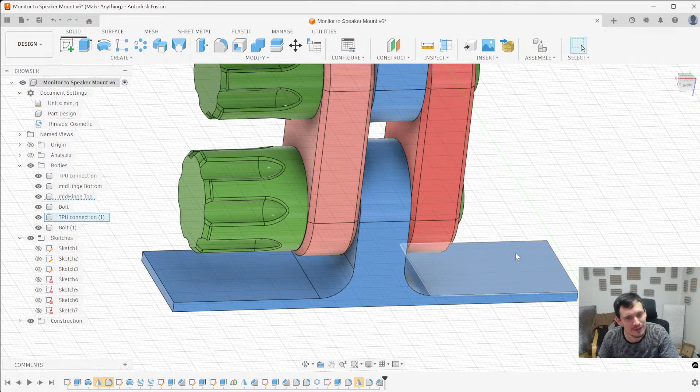Oh, sorry. This is another weird thing about Fusion. With fillets, you can do a variable fillet, which is pretty fun sometimes. You can say, here I want it to be 1 in the middle, but maybe 0 at the ends. You get this very nice transition. Why can't they have that option with chamfers? I think it should be an option.

Anyways, we are going to keep this as 1, but we want the chamfer to actually follow around the entire edge here. So first we're going to do this. We're going to do some 2mm fillets around these faces.

Again, besides looking prettier, rounding these corners out will, for one thing, prevent curling up when printing. With TPU, that's hardly ever an issue, but something to keep in mind. It'll also make it less likely that the parts peel off in normal use. Like rounding, I don't know how to explain it, to be honest.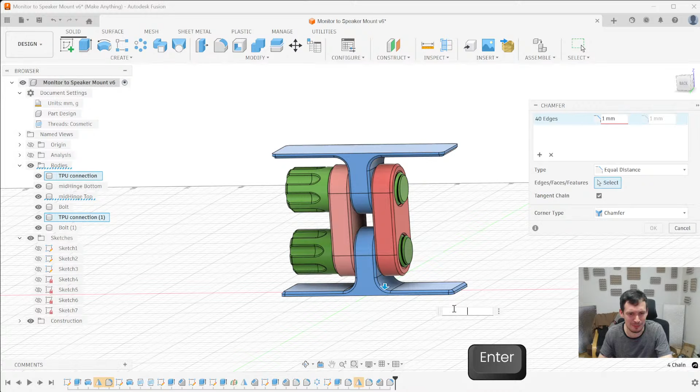Just getting rid of sharp corners is generally nice. Besides looking nice, it tends to work more cleanly.

Have I ever tried Onshape? I did play around with it a little bit, but it was around the same time that I started using Fusion, so I didn't really see the need to use both.

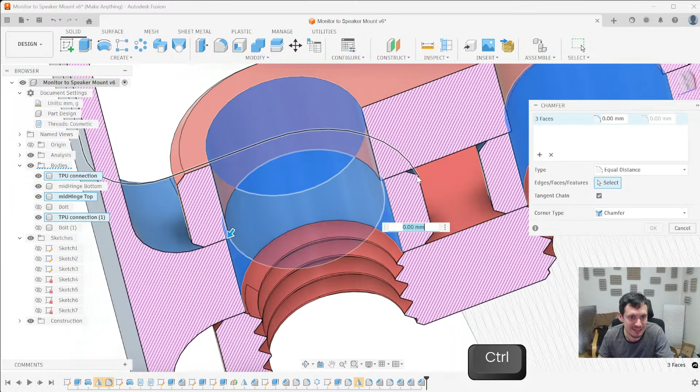Aha. We've also got these inner surfaces. That's why section analysis is very handy. We want to chamfer all of these as well. 0.4. Just so there's no edges snagging onto things.

Exactly, Hank. Onshape, in order to have any privacy with your files, you have to pay for the subscription, I believe. So that doesn't work for most people, actually, unless you're doing things entirely just for fun. Which, also, yeah, if you're coming up with grand inventions that you're going to be selling, then you should probably also pay for Fusion. So, maybe you want to learn Blender or FreeCAD or OpenSCAD. All the really tedious ones are unfortunately the ones that are the most open.

All right, finished my coffee. I don't think I'm gonna finish all my pastries today. It was a lot, but they were very delicious.

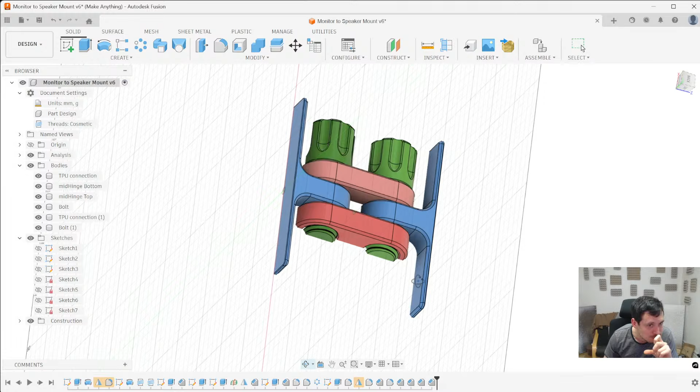I think I'm pretty happy with how everything looks. I will be curious, with the VHB tape really covering all of these surfaces, whether there will still be any drooping with the design. But of course I can just adjust how I stick the printed part to my speaker and to the monitor. I can pre-angle the parts so that it accounts for the droop and they end up facing the way I want them to. So I'm not too worried.

In my mind, this will still be working really well. It will be fun to see how it looks in practice. Yeah, I think I'm happy with it now. The only other thing I could think of is maybe to cut out some material here in these hinges in the middle. But I think it would pretty much just be aesthetic. It's easier to just adjust the print settings, right? Use lower infill or more walls. So, I think it's pretty nice.

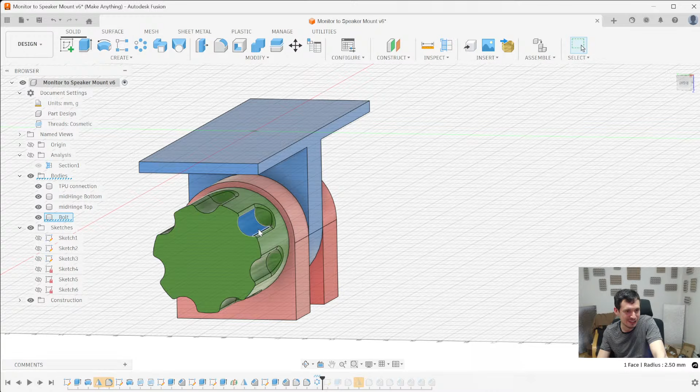Ooh, I know. One thing I did not think about yet. Because these are printing this way, there's a little bit of a nasty overhang here. You know, I'm not a fan of these overhangs. I should have dealt with this earlier. Let's see how far back I want to go to do this in a nice way. I guess I just need to go to before the chamfers. Maybe before the mirroring. Oh no, not affecting that. Just this part.

Okay. All I'm gonna do here is, actually it's a good thing I left enough space between these two hinges, because now I can keep the strength here. So first thing I was gonna do, I'll create a center line, and I'll create a line.

If I start a line from a circle like this, oh, why is it doing a weird double click thing? There we go. If I hold shift, it'll immediately apply a tangent constraint. Oh, or a perpendicular constraint. I didn't know that. You can do a perpendicular or tangent, apparently, depending on exactly how the lines draw. Oh, it's getting a little buggy.

Anyways, wow. Okay, I guess it depends. If you're looking more perpendicular when you press shift, it'll lock to perpendicular. If it's looking more tangent, it'll lock to tangent. From the get-go, if you just draw a line and hold shift, perpendicular. It's not that big of a deal anyways, it just saves one step. I'm going to draw that line, a line here to the center line.

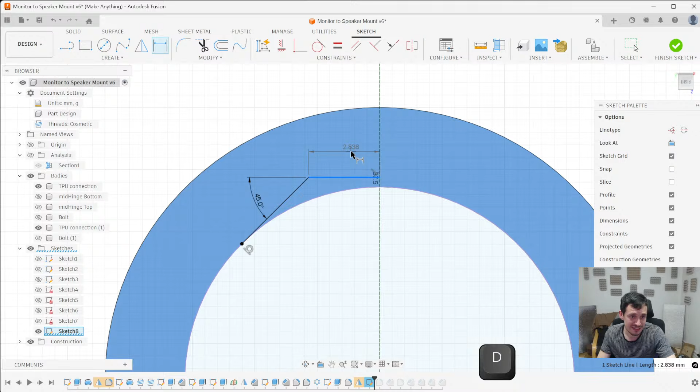I'm going to make this dimension 45 degrees. That's the maximum overhang I want. Then I can decide how much I want the print to bridge. Basically, I just want it to not intersect with this circle, so it's going to depend from one print to the other. Here, this is 3 millimeters, so 6 millimeters in total. It can droop a little tiny bit, so I like there to be a little bit of a gap here.

I'll select those both and mirror them. Basically, I can cut this away. That's how I create a circle overhang. It looks a little awkward, not super pretty, but it works pretty well for most cases.

Now, if I want to maintain a consistent distance between the inner and outer walls here, I can select these and offset them to match. What is that, was it exactly 3? What did I do, 3.2? Oh no, it was some weird number. Well... 3.2. Huh.

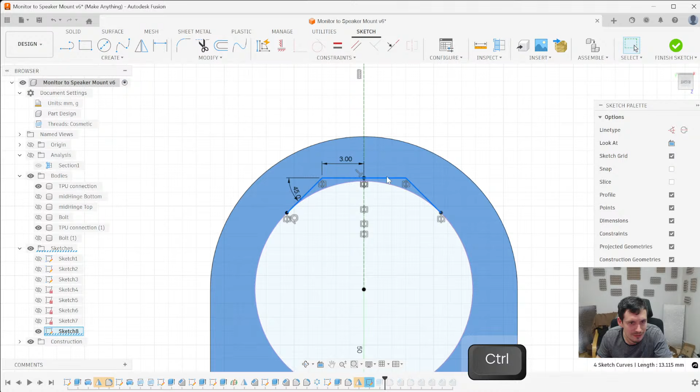Yeah, offset it the same amount. So then I can do that extrude cut and then do the same extrusion here. A little bit nicer. And because there's a 3.2 distance, we can also add a 3.2 fillet here, and that'll really keep it nice and clean, and equidistant all around.

I am going to do this for both of these hinges, but they're identical, so I don't need to do the design twice, except if I wanted to visualize it. I can also take this little chamfer and make sure I'm chamfering all those edges.

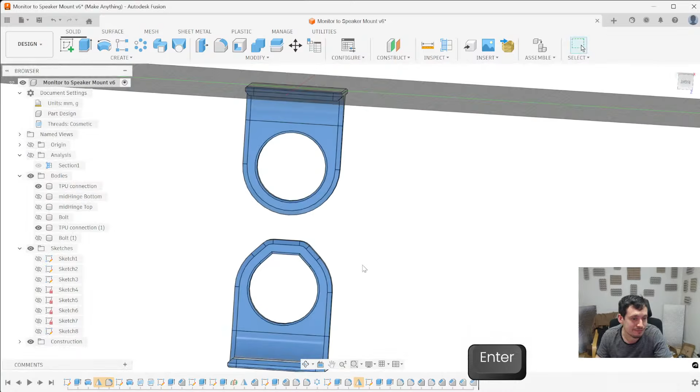There we go. Even with TPU, which does droop a little bit more, this little change should deal with that. Should print nice and clean, support free. Okay, now we're done.

At this point, I'm going to remove these two redundant parts. I can just right click and remove. Pretty much always you want to use the remove command instead of delete, because delete will delete all the previous references to them in the design. Remove just removes them at this point in the timeline. You can also move that command around, and you can suppress it if you want to unremove them. It's a lot less destructive to use remove versus delete.

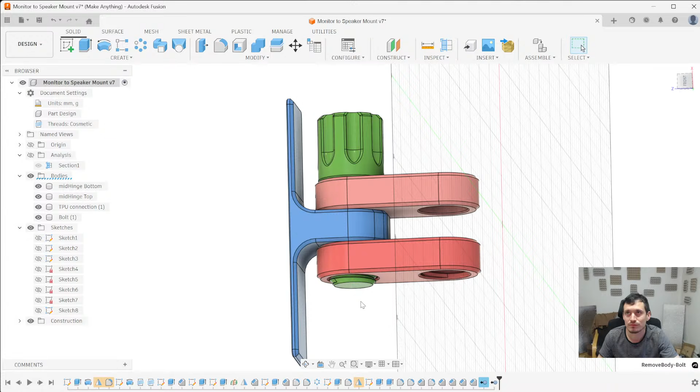Yeah, all these other parts are unique. So finally, I'll use the align tool. Select the faces that will be going against the printer bed, then click on the top plane, flipping them if necessary, and aligning everything how I want it to print.

They're all overlapping, but we're going to save them individually, so that doesn't matter. Just taking a quick last peek. I don't think there's anything else I need to change, I'm pretty happy with this.

And yeah, I'm actually glad I ended up going with this double hinge design, because in a lot of ways it's better. It means that I can print these inner hinges in a solid material, and only these outer parts have to be flexible TPU to conform to the parts they're connecting to. Should be more versatile, actually.

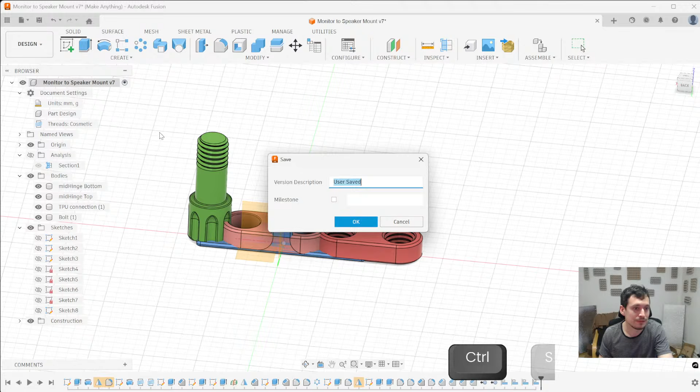Okay. If you've watched any of my streams or any of my videos, you know how to export. It won't reveal any of my files, so I'll show you real quick.

Up here, very top of the browser tree, right click on the item that has the name of your file, save as mesh, and make sure you change the structure to one body per file. My refinement settings are set to high, so that's good. Hit OK, save, and it'll save all of those 4 bodies separately. There's our design. We're going to bring them into Bambu Slicer now, or the slicer of your choice.

As a matter of fact, I usually do my TPU prints on my Qidi Q1 Pro. For one thing, the print quality is comparable to the X1 Carbon, but also I have my AMS connected to the X1 Carbon, and it doesn't like my TPU filaments. There are some TPUs now that Bambu designs specifically for use with AMS, but I don't use those.

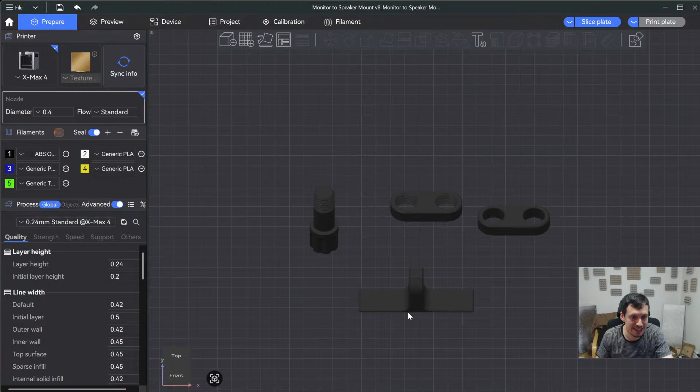Like I said, this part here is going to be flexible, so it needs to be on its own plate, printed separately. I'm going to select my Q1 Pro here.

With any model I would do this, but specifically with TPU, the seams can be a little messier depending on the material. So it's nice to use seam painting to put it somewhere that won't affect the functional aspects of the design.

So basically just that. Here on the inside, it'll probably automatically go along an edge, which can be nice, but I think here it might be better to just do it this way. We'll draw that seam on.

And these can all be printed with a solid filament. PLA would probably work okay, but these are going to be under duress - light duress, but duress nonetheless. So it's probably better to print these in PETG, ABS, or ASA.

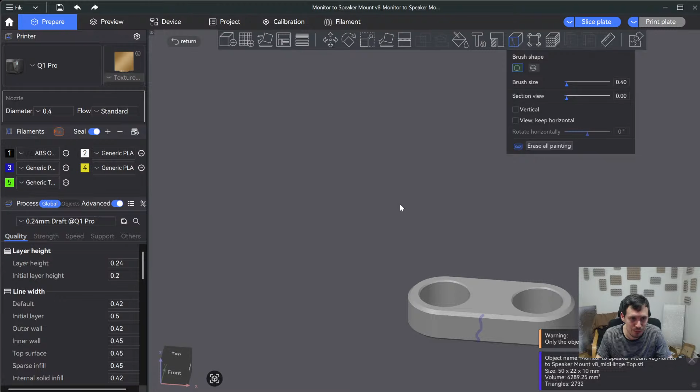But yeah, a little bit of seam painting here. I always like to go with a little squiggle just for fun. And on the bolt, it doesn't really matter.

Of course, we want to print 2 of these. Whoops, get over there. And 2 of these. Depending on how confident you are in your print settings, you might only want to print 1 at a time. I'm not going to bother to show you guys all the print settings here.

Let's see what's worth mentioning with threads. These threads are pretty big. As you saw, I used my custom 3D printing threads. They're made to print well, so with the optimal 0.16 millimeter print quality, they should print just fine.

But sometimes if you want really clean threads, or are just printing very small threads, you can go with a 0.12 millimeter layer height, something like that.

Not much else to say. I'll just make sure to print these quite beefy. I'll probably give them 5 or 6 walls. These TPU ones, I'm going to make sure this bottom part is completely solid.

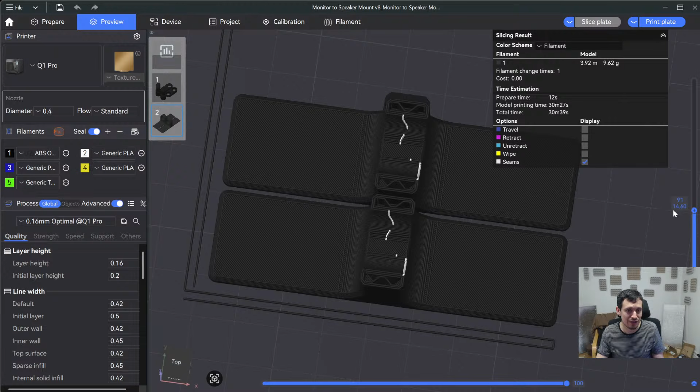And the rest of it, yeah, it'll probably end up being mostly solid, if not completely solid. And then for these parts, the bolts, they are printing in a weaker orientation, since the forces pulling on the bolt are kind of pulling apart the print layers.

It's not 100% ideal. I could have mitigated it, but because I made the bolts so thick, that was kind of my solution. So by making these 5-6 walls or even solid, they'll be plenty strong enough. There will be great layer adhesion, especially printing with the materials I mentioned.

So that's going to be that. Once again, I'm not going to show the printing this livestream, but I'll give you all an update next time. And maybe I'll even make a short about this one. I think it's a pretty fun design. If it works as well as I hope, I think it's pretty nifty.

So there we go, clocked in at just over 2 hours. Pretty good considering how much I was talking, I think.